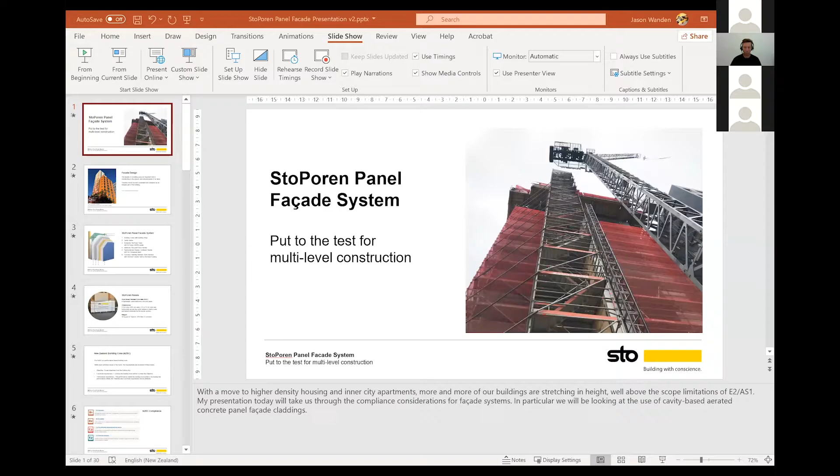Presentation today focuses on multi-level construction and compliance. Jason Wanden from Sto will be talking about key compliance areas for render facade systems and how key performance tests completed by Sto can be applied.

Jason will take a look at the use of StoPoren Panel Facade systems, incorporating their product StoPoren aerated concrete panels, specifically on multi-level residential and commercial construction. Jason will be covering considerations of the New Zealand Building Code clauses B1 structure, B2 durability, C3 spread of fire, and E2.

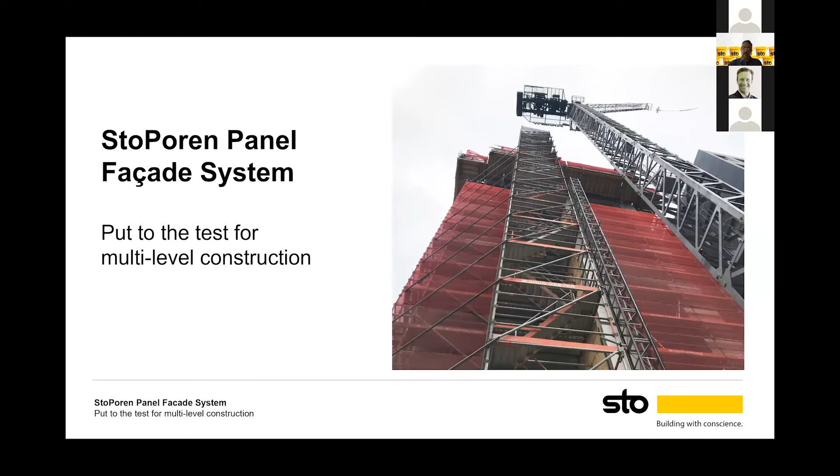With a move to higher density housing and inner city apartments, more and more of our buildings are stretching in height, well above the scope limitations of E2AS1. My presentation today will take us through the compliance considerations for facade systems, and in particular we'll be looking at the use of cavity-based aerated concrete cladding systems.

Facade design: the facade of a building plays an important role in contributing to the amenity and attractiveness of an area. Facades should be well considered and designed as an integral part of the building.

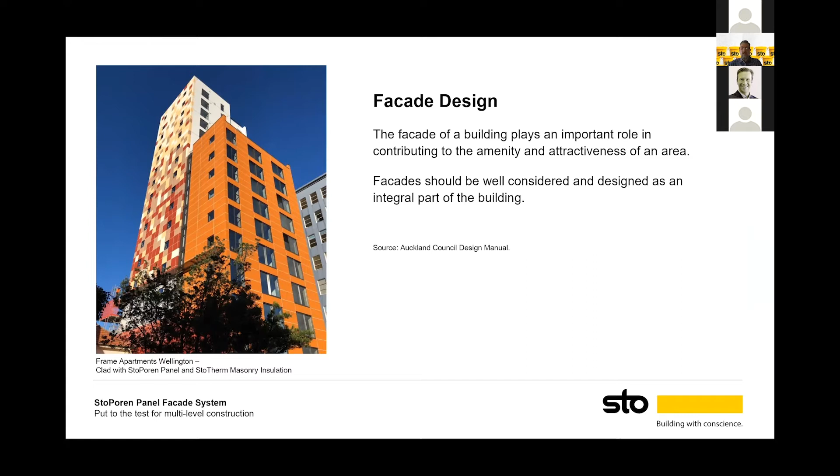Layer 1 is the building frame and wall underlay. More often than not, the underlay on multi-level construction will be a proprietary rigid air barrier system. It'll play a role not only in the weather tightness performance, but also resisting wind pressures and protecting the structural frame from fire. Layer 2 is the cavity batten, typically 20 millimeters thick.

With the need for materials of limited combustibility in the cavity space of multi-level construction, more often than not this will be a fibre cement, aluminium, or in the case of a tested system, a timber cavity batten. Layer 3 is the aerated concrete panel, in our case the StoPoren panel. The panel is installed over the cavity battens with structural fixings penetrating through the cavity into the structural wall frame behind.

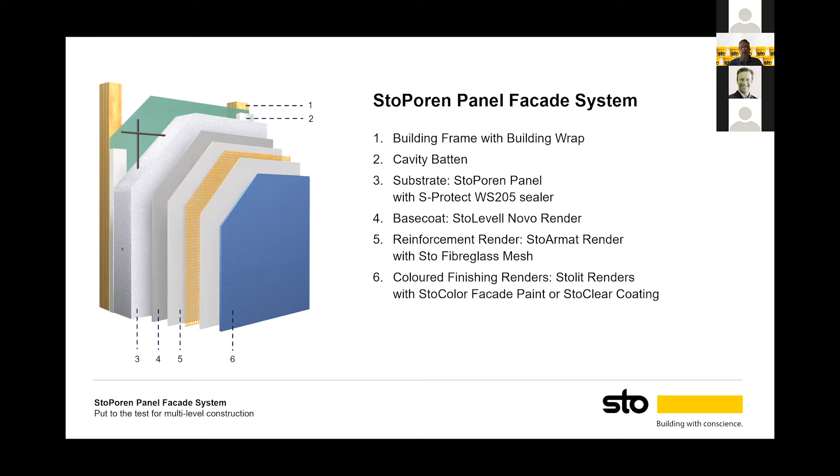The StoPoren panel is then finished as outlined in layers 4 to 6 with the StoArmat fiberglass mesh reinforced render system, with selected finishing renders and facade coatings.

As outlined on the previous slide, StoPoren panels are manufactured from autoclaved aerated concrete and they're reinforced with a steel mesh. The panels are 2.2 meters long, 600 millimeters wide, and either 50 or 75 millimeters thick. They are laid horizontally across the cavity battens to provide a solid, permanent substrate for the render system. The mass of a 50 millimeter thick panel is approximately 32 kgs per square meter, which is about 20% that of concrete.

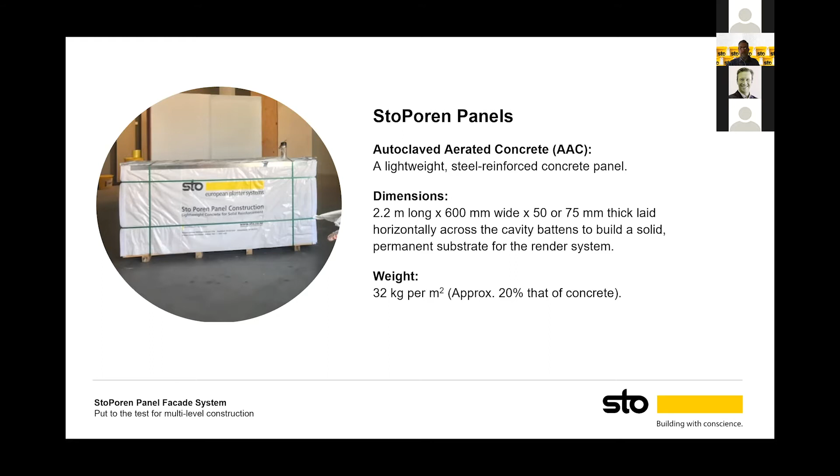The New Zealand Building Code is a performance-based building code. It sets clear expectations of the standards a building should meet. It consists of 38 technical clauses, and within each technical clause, the requirements are explained in 3 levels: the objective, which is the social objectives from the Building Act; the functional requirements, the functions that the building must perform to meet the objective; and the performance requirements, which is the performance criteria the building must achieve.

And by meeting the performance criteria, the objectives and functional requirement can be achieved. So to summarise, the building code states how a building must perform its intended use, rather than describing how the building must be designed and constructed.

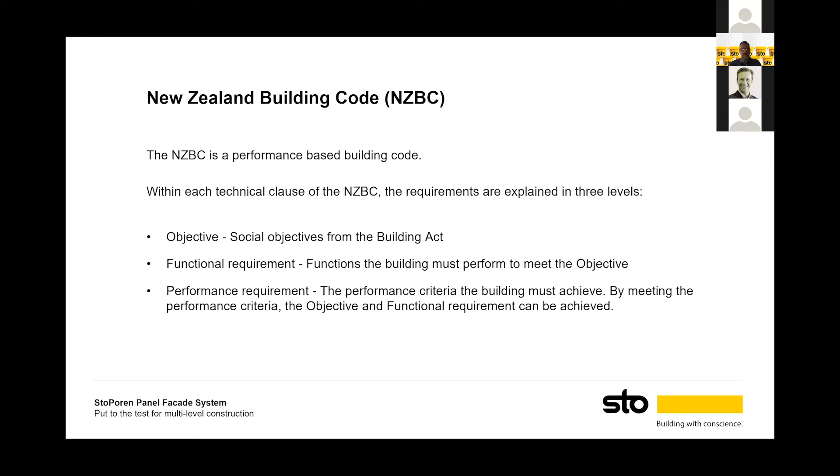The key NZBC compliance areas for facades are Clause B1 structure, which requires buildings to withstand the likely loads they'll be subjected to during their serviceable life, including wind and earthquake. Clause B2 durability, which requires the materials used in the construction of the facade to remain functional for the minimum period specified - in this case, it's 15 years for the panel and render systems and 5 years for the facade coating.

Clause C3, fire affecting areas beyond the source, including horizontal and vertical fire spread. And Clause E2, external moisture, which requires the external facade to prevent water from causing undue dampness and damage to the building structure.

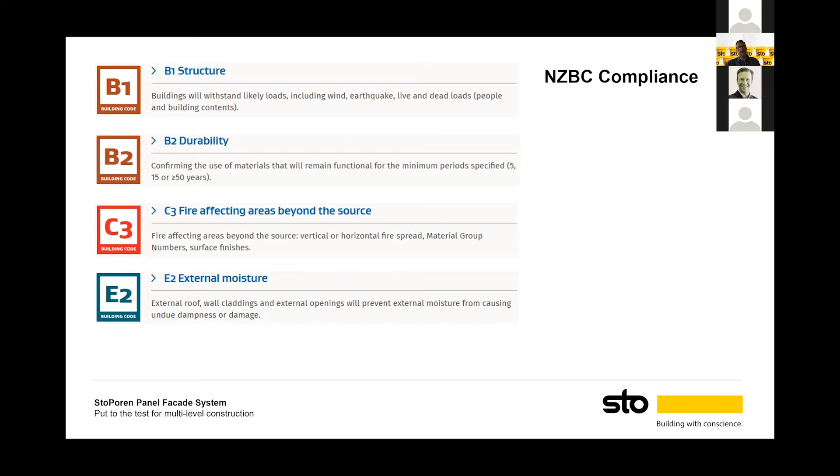Clause B1 is about structural failure resulting in injury, loss of amenity as defined by the building regulations, and physical damage to other property.

Physical conditions that need to be addressed for facade cladding include self-weight, which is the system's ability to resist its own weight when installed on the wall, and earthquake - the system's ability to withstand SLS seismic events and remain functional as a cladding, and also ULS seismic events without putting human life at risk.

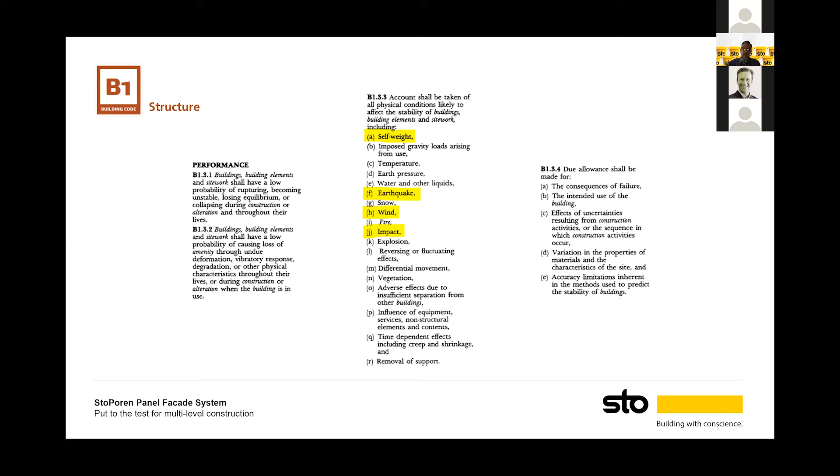Wind - the system's ability to withstand wind pressures on the facade - and impacts, which is the system's ability to withstand hard and soft body impacts as appropriate for the building's use.

The StoPoren panel system has been subjected to a range of structural tests at BRANZ. This included wind face load to determine the system's resistance to wind suction pressure, racking to determine the system's resistance to damage under seismic deflection, and in-plane shear strength to determine the panel fixing's ability to support the weight of the panel and resist the forces applied by the panel suspended out on the cavity.

Assessments were completed for both timber and steel frame construction.

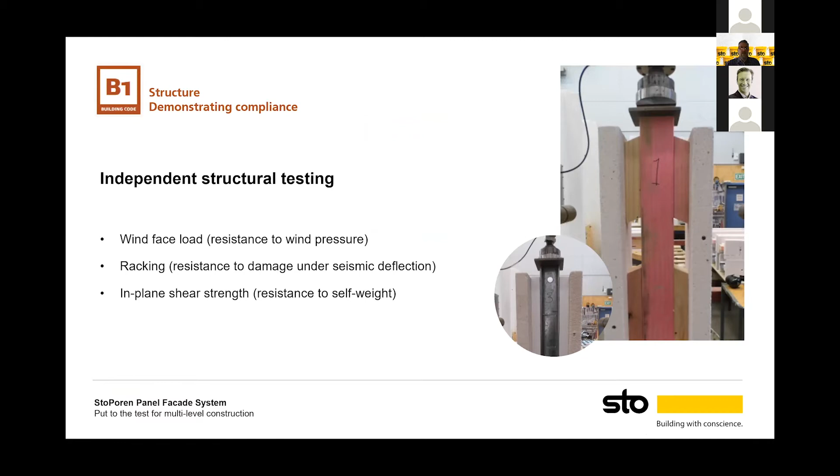The structural performance of the system was also assessed during facade testing to AS/NZS 4284. The panel was subjected to positive and negative pressures of 4.5 kPa and was also subjected to deflection along the line of the mid-floor before being retested from a weather penetration perspective.

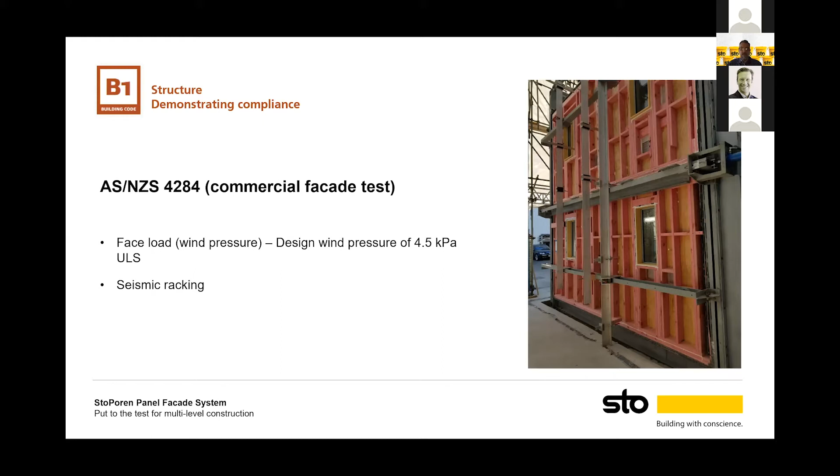Facade systems are typically required to meet the NZBC durability requirements of 15 years for the cavity system and facade panel, and 5 years for the paint or coating system.

B2.3.2 is an important consideration as well, as it states that individual components of the building system are required to have the same durability, or be installed in a way that enables their replacement without having to remove building elements that have a greater durability.

An example of this is wall underlays, which may only have a 15-year durability requirement in isolation, but are required to have a serviceable life equal to that of the facade cladding that covers it.

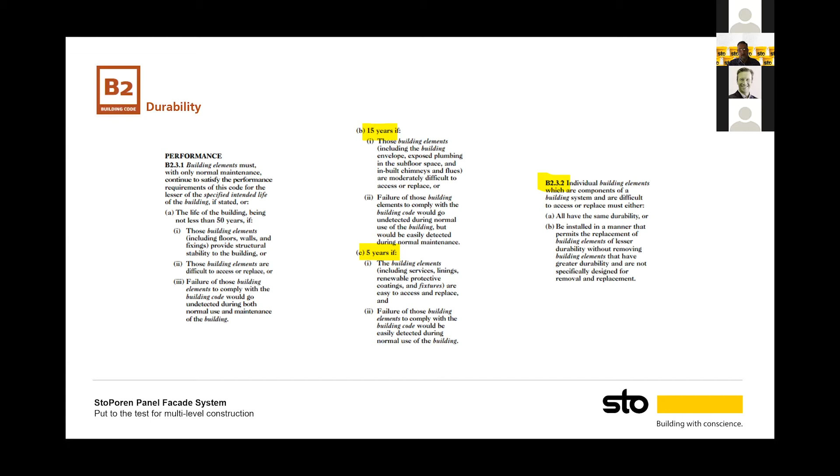Testing of StoPoren panels was completed at BRANZ. It included assessments of compressive strength, moisture movement, corrosion protection of reinforcement - which is probably one of the more important assessments to ensure that the steel reinforcing mesh is adequately protected from moisture - and composition analysis to determine the mineral composition and mineral structure of the aerated concrete.

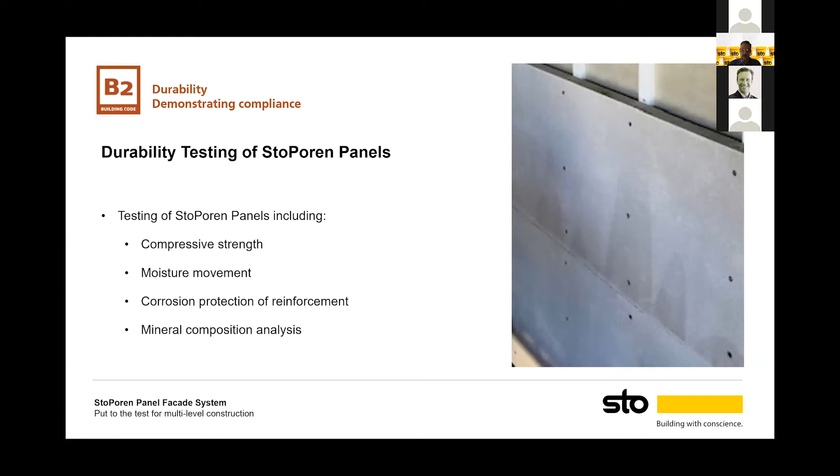The Sto renders and coatings have also been subjected to testing by BRANZ, across multiple systems, not just the StoPoren system. The testing included adhesion to substrates and resistance to UV.

An expert opinion confirming compliance of the system with the NZBC performance requirements was provided on the basis of this testing. As the pictures attest, the StoArmat and StoLitK renders are highly flexible and resistant to fracturing and mechanical stress. The StoArmat render has an impact resistance of about 10 times that of cement-based or mineral products.

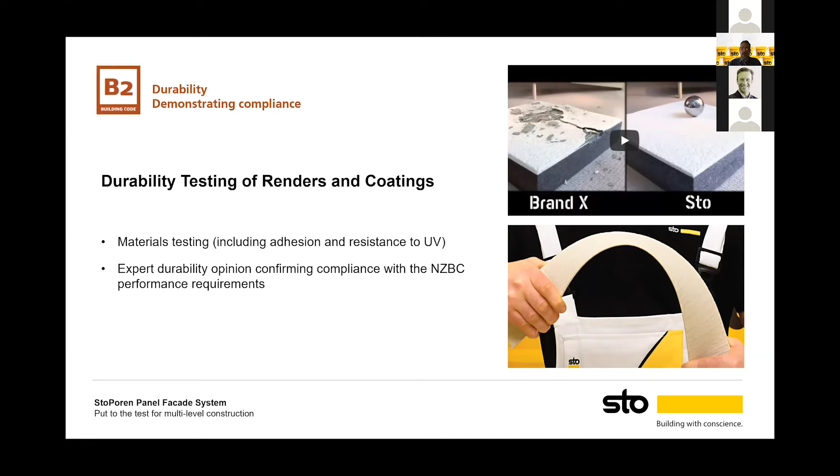There are two performance clauses that describe the constraints for control of external fire spread. Clause C3.5 sets the requirements for limiting the vertical fire spread, and Clause C3.7 covers horizontal fire spread and the ignitability of the wall cladding materials.

It should be noted that vertical fire spread considerations only kick in when the building height is greater than 10 metres.

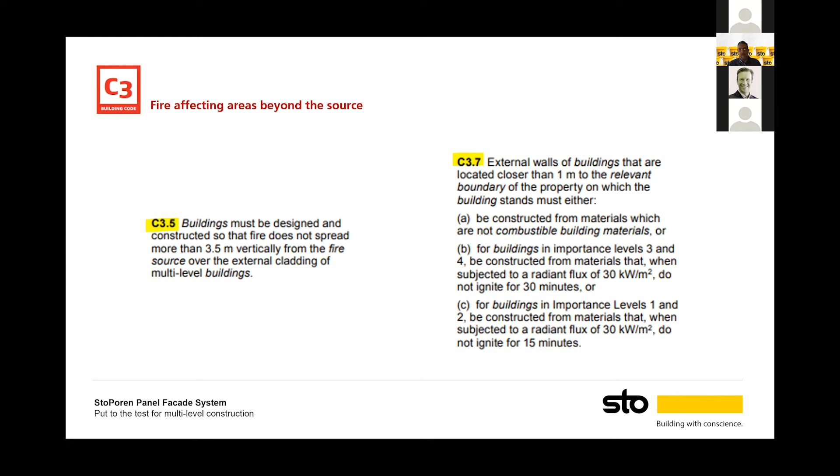Significant high-rise events globally over the last few years have increased the understanding of how fire spreads externally and within modern facade construction. One of the first was the fire at the Lacrosse apartment building in Australia.

The cause of the blaze was revealed to be an unextinguished cigarette left in a plastic food container on a 8th floor balcony. It spread to the timber tabletop and then to a nearby air conditioning unit.

Flames ignited the external wall cladding, and aided by the combustible material located within the wall structure, it quickly spread to the top of the building.

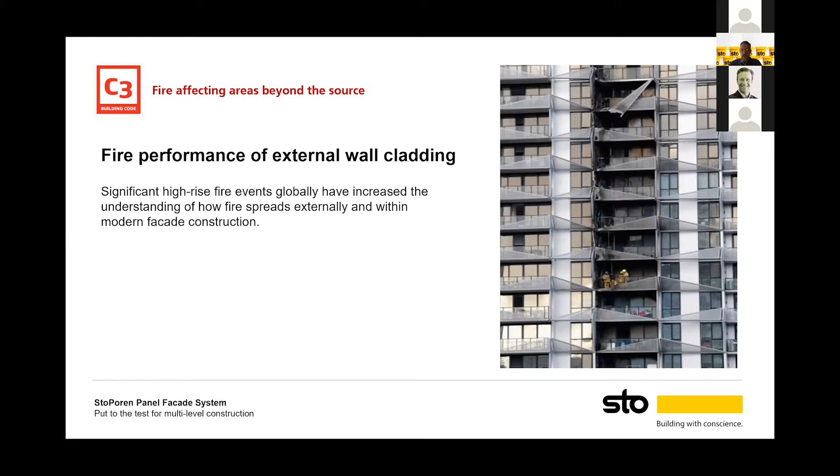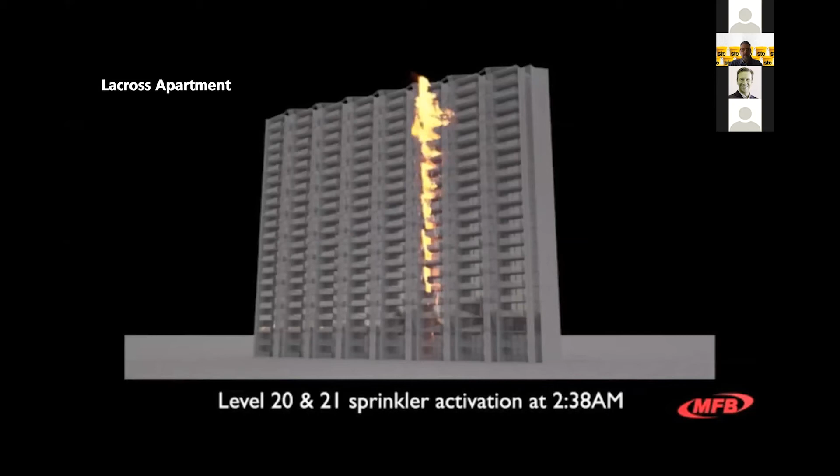Probably the most well-known of the recent fire-related disasters is the Grenfell Tower, primarily due to the catastrophic loss of life. The exterior cladding of aluminium composite panel encompassing a combustible core of polyethylene and plastic insulation contributed to the rapid spread of fire in just 1 hour.

A couple of these photos: 1:30 in the morning is that first photo. You can see a little over an hour later, the building is well consumed, and some 2¼ hours later, there's not much left.

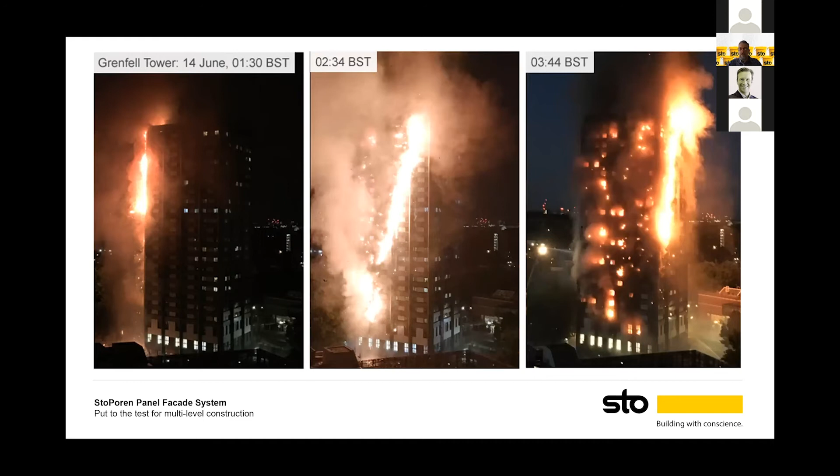As a follow-on from the guidance document released in February 2019, MBIE have recently undertaken consultation for the amendment of the NZBC acceptable solutions and verification methods as they relate to protection from fire. In particular, they are looking to amend the fire testing requirements for cladding systems to reference large-scale international standard tests. A focus on vertical fire spread sees not only the face of the facade, but also the materials within the external wall cladding system needing to be addressed. Consultation is closed, however, the next building code change has been delayed due to COVID until September this year.

A key to the prevention of fire spread is the selection of materials within the cladding system that are non-combustible or of limited combustibility. StoPoren panel has been tested to AS1530 Part 1 and is deemed to be non-combustible. This is great as it means that the exposed face of the panel in the cavity space will not support the vertical spread of fire when coupled with a non-combustible or otherwise verified cavity system.

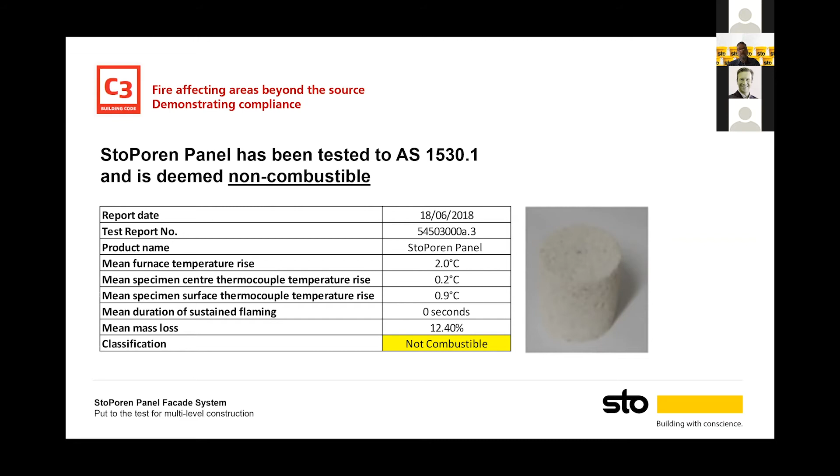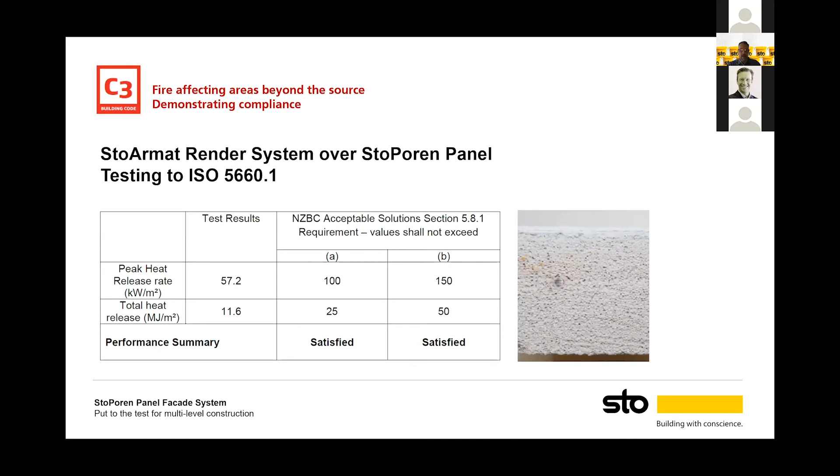Acceptable heat release rates for external wall cladding systems for the control of horizontal fire spread still remain a requirement, depending on the building height and the distance to the relevant boundary. The StoArmat render system over StoPoren panel has been tested to ISO 5660 Part 1 and achieved the performance level A classification.

One of the new definitions likely to be included in the building code update is limited combustible. A material that has limited combustibility is classified as A2 when tested to BS EN 13501 Part 1. These materials contain minor amounts of combustible material, but are unlikely to significantly contribute to the spread of fire. STO renders have all been tested to EN 13501 Part 1 and have achieved A2 classifications.

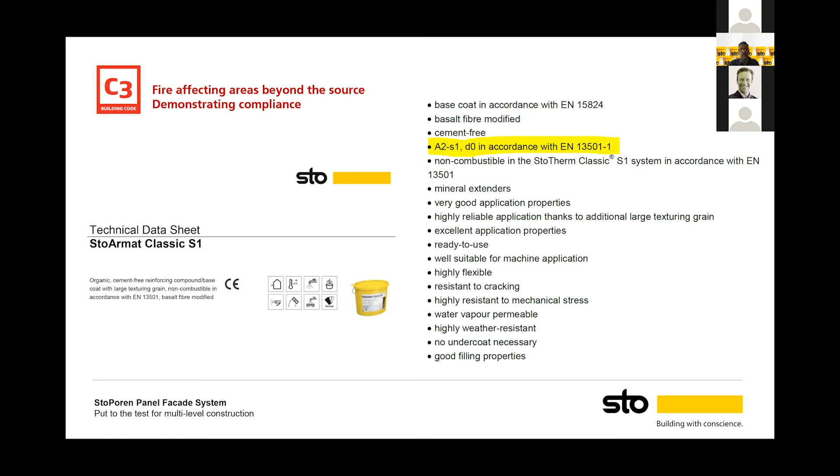An example of a couple of the international test standards proposed for inclusion in the NZBC update are BS 8414 and AS 5113. Both of these standards require the testing of a full-scale facade with a height of approximately 9 metres and a width of approximately 3 metres across the main face with a 1.5 metre wing wall. The space you can see at the bottom of that panel is filled with 360 kgs of dry timber, which is lit and propels flame up the face of the facade.

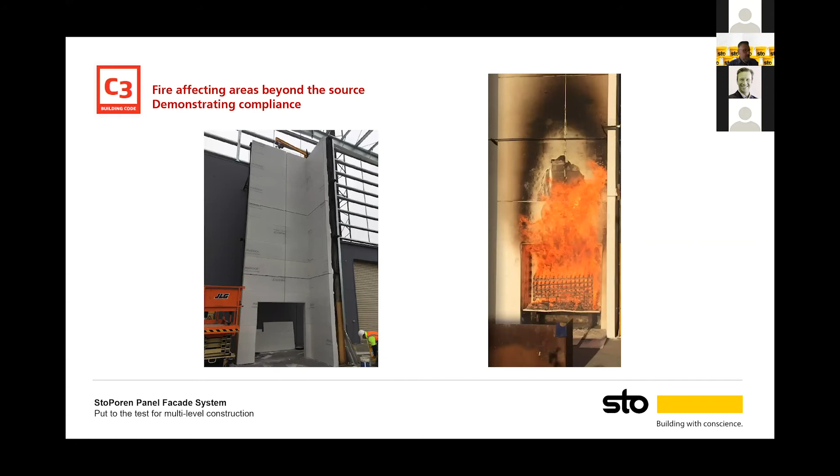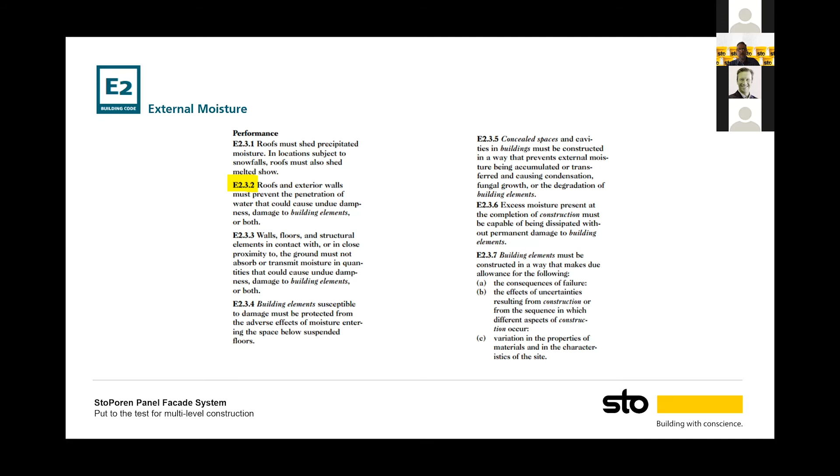The external moisture clause is all about preventing the penetration of water that could cause undue dampness and damage to building elements. There are several weather tightness verification methods that are accepted typically as a means of demonstrating compliance.

E2VM1 is designed more as a verification method of claddings for buildings within the scope of E2AS1, so not specifically suited to multi-storey construction. AS/NZS 4284 is a verification method for commercial facade systems. It tests multiple aspects of facade performance, including structural strength and water penetration. E2VM2 is the newest of the verification methods available and represents a series of tests from AS/NZS 4284 for assessing the weather tightness performance of domestic-oriented wall cladding systems for use on buildings between 10 and 25 metres high.

The StoPoren Panel Facade system has been tested to AS/NZS 4284 with test pressures based on a design wind pressure of 4.5 kPa ULS. The system was also tested to E2VM1 with standard and elevated pressures aligned with the requirements of E2VM2. The system successfully met the requirements of both those verification methods.

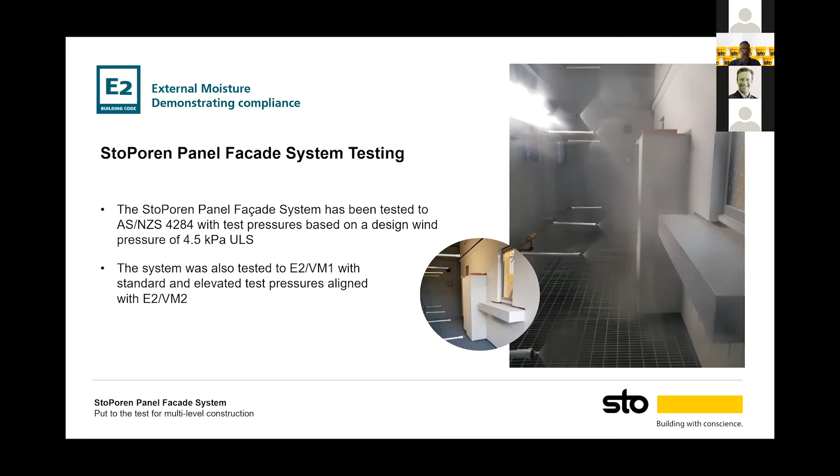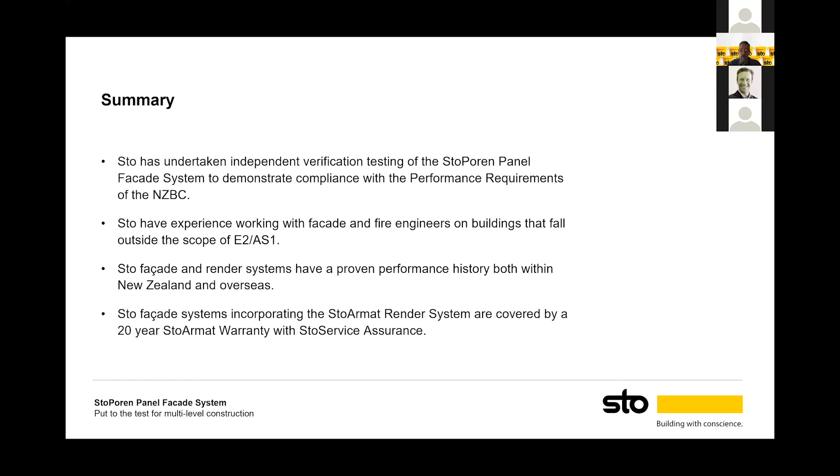So in summary, STO's undertaken a series of independent verification tests of the StoPoren Panel Facade system to demonstrate compliance with the relevant performance requirements of the NZBC. STO have experience working with facade and fire engineers on buildings that fall outside the scope of E2AS1, and our facade and render systems have a proven performance history both in New Zealand and overseas. STO facade systems incorporating the StoArmat render system are covered by a 20-year StoArmat warranty with STO service assurance.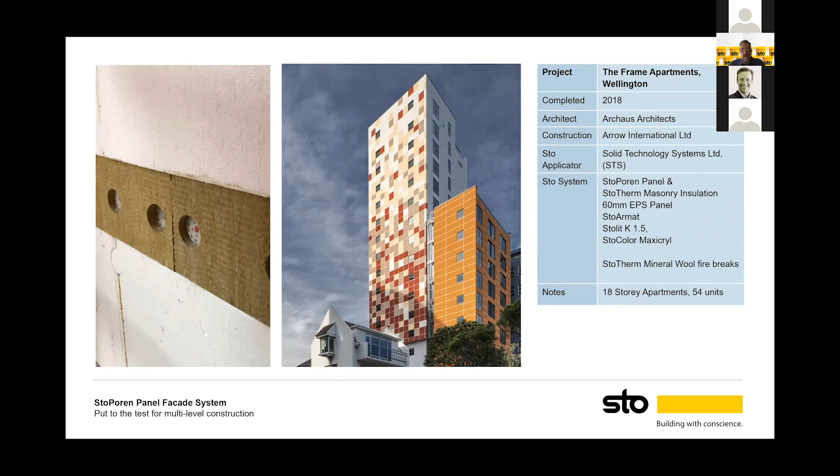Just a couple of reference projects. Frame Apartments in Wellington, completed 2018, Archaus Architects, 18 stories, approximately 60 metres high, clad with a combination of the StoPoren Panel Facade system and our StoTherm masonry insulation system. It's a fantastic example of what can be achieved with a render finish.

Thank you very much. Happy to take questions, Matt.